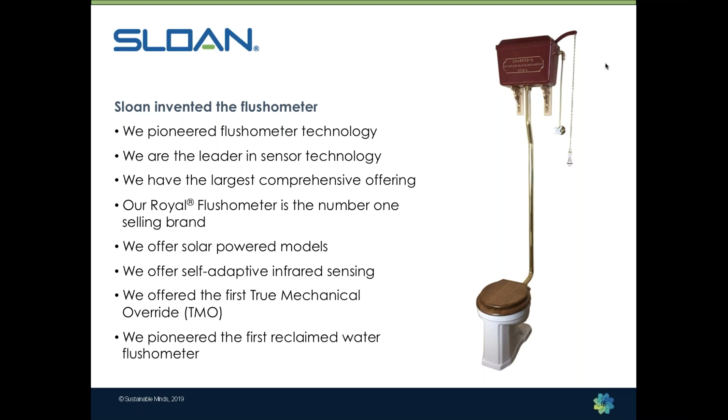So I mentioned earlier that Mr. Sloan invented the Royal Flushometer back in 1906. His invention replaced the tank and chain setup that was common back in those days. That product consumed anywhere between 10 to 12 gallons of water to flush a toilet. The Royal valve at that time used only 6 gallons of water, so right away you were saving half the amount of water. Originally, it was invented as a water savings device.

Construction was booming in 1906, and Mr. Sloan worked with architects, engineers, and building owners to get his new product installed into the newest buildings in Chicago. In his first year, he sold 1 flush valve. He knew he had a great product though, so he continued to work with designers, engineers, and building owners in Chicago, but also spread his efforts to Milwaukee, Detroit, and other nearby cities, and his work paid off. In 1907, he doubled sales.

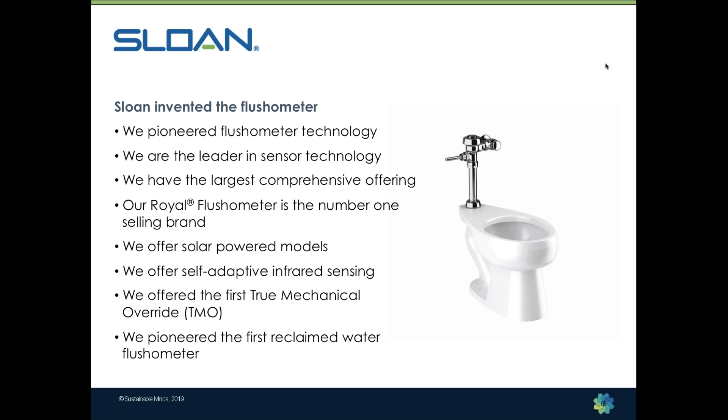Yes, he sold 2 valves in 1907, but fortunately Mr. Sloan was a very persistent man, and he continued to push his product. Sloan's became the company that it is today, and the Royal Flushometer has grown to be the number 1 selling flushometer brand.

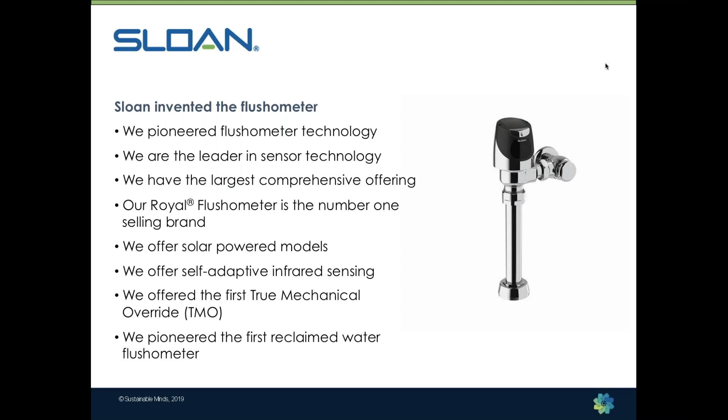The product has evolved over the years. It's now offered with battery or hardwire sensor technology, dual flush and sensor dual flush technology. We've even incorporated a PV panel into sensor units that's able to recharge the internal capacitor using just the ambient light in that restroom.

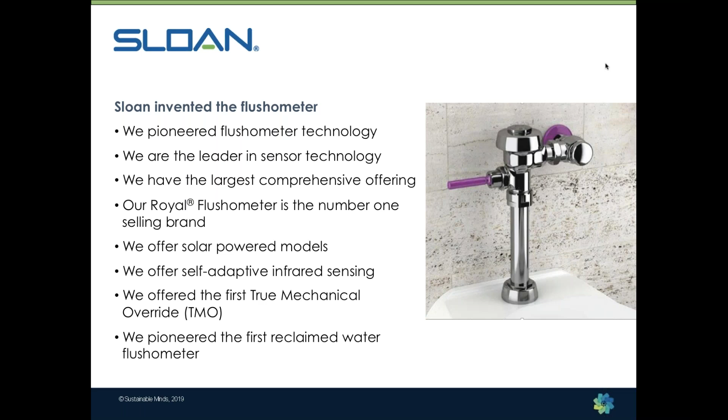We also have a reclaimed water flushometer. This product was designed specifically for the harsher qualities of reclaimed water. It comes with the proper Pantone purple diaphragm kit internally, and you can also get it with the optional purple colored handle. Also per the plumbing code, we have to supply a non-potable water plaque that you have to place near that flush valve, just to ensure no one tries to drink the water out of that urinal or toilet. Yes, that's actually part of the code.

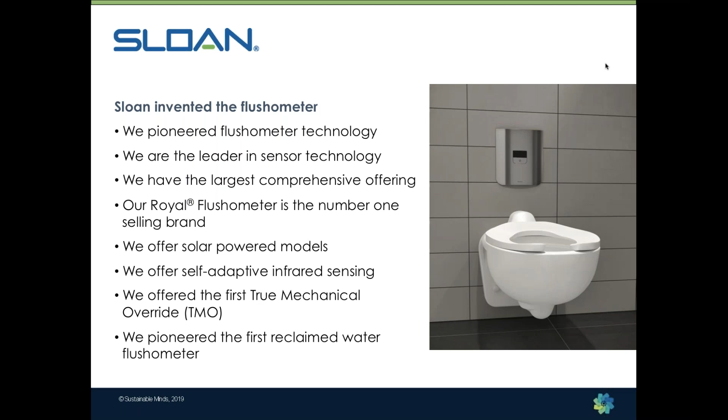The evolution continues today with our concealed valve that doesn't need a chase, which gives you back additional square footage to that building or project. The CX valve you see here can be installed and maintained all from the front panel. It's a small panel that allows you access to that valve and plumbing behind the wall. Kind of a nice, new, sleek, modern design for flush valves.

Our vitreous china fixtures have all been engineered specifically for commercial use. This allows our products to achieve high MAP scores for all of our vitreous china fixtures. The MAP performance or MAP score is an ASME fixture standard that rates the flushing performance of water closets. So if you're specifying water closets, the higher the MAP score, the better the performance of that valve. The highest MAP score achievable is 1,000, so you're trying to find a flush valve to specify that's close towards that 1,000 score.

We also offer a full line of washdown, water-free, and hybrid urinals. Our washdown urinals are available in a range of flush volumes, everywhere from a half gallon, a quarter gallon, down to an eighth gallon. The hybrid, which you see there, is the newest version of our water-free product. This is a water-free product device that's actually plumbed to the building's water supply system.

Most of the issues that we've heard about water-free units were from the lack of maintenance on the actual units. When that cartridge is changed out, the custodial staff should be flushing out that drain with about 5 gallons of water. Unfortunately, from what we've discovered, this wasn't actually being conducted.

What happens is struvite, the minerals from urine, collects and builds up around that drain and constricts the flow out, which causes many of the issues associated with water-free urinals. So the hybrid uses our jet rinse technology and automatically purges that drain line with 1 gallon of water every 72 hours, which washes out the back of the cartridge and keeps that drain line clear. This means the only maintenance custodial staff would have is to change that cartridge out whenever needed. So the hybrid, even though it's plumbed to the building's water system, is still considered a water-free device by USGBC because it consumes less than 150 gallons of water per year.

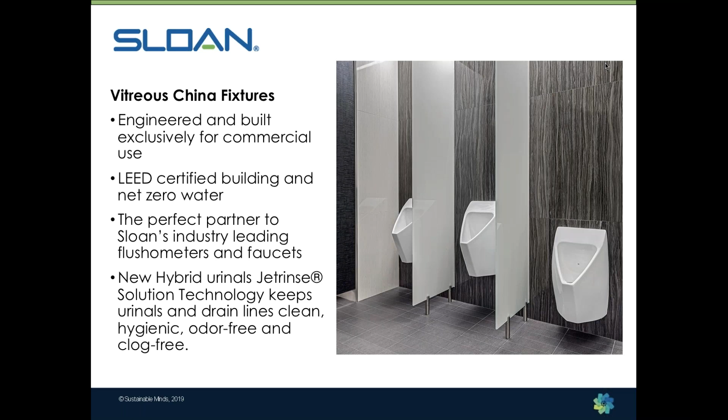Sloan was also the pioneer in the development of commercial sensor faucets. We now offer the most comprehensive line of sensor faucets for the widest array of applications, with more styles, designs, and options than any other manufacturer out there, so designers, architects, and engineers can find the perfect solution to meet their needs while staying within budget.

Our faucets are available in a variety of flow rates, from half a gallon down to 0.35 gallons per minute. Several models can also be programmed to run for a certain amount of time to help purge water supply lines and keep bacteria from growing in lines that aren't used very often.

We have a wide variety of power options including battery and hardwired, and we also have PV and turbine power harvesting options, so you can incorporate those into just about any Sloan faucet. Our newest feature is our recently released Sloan Connect smartphone app.

The system allows you to sync with a handheld device, whether it's an iPhone, a tablet, or a Samsung, whatever. You can tap directly into the Sloan faucet, which really helps because you can troubleshoot that faucet without actually taking it out of service. So you tap into it, and it'll tell you various data points like battery level, water consumption, and a host of other data points on that particular Sloan faucet.

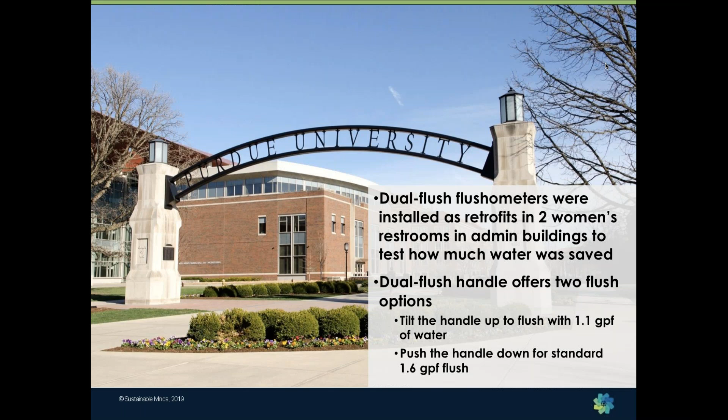Just a real quick few case studies. The first is from Purdue University, where the standard flushometer handles were swapped out with dual flush handles. If you're not familiar with dual flush, the handles offer two different flush options: tilt the handle up for a light flush of 1.1 gallons per flush, or push it down for the standard 1.6 gallons per flush. Purdue retrofitted two women's restrooms in two of its admin buildings with a total of 12 different handles. The school's engineering team chose the printing services building and the telecommunications building because both buildings had good historical water use information.

The restroom plumbing fixtures are the only major sources of water in those buildings, and women actually comprised a high number of those buildings' populations. In the printing services building, water use dropped from an average of over 10,000 gallons a month down to about 5,800 gallons per month, resulting in a 43% drop in water usage. In the other building, water use dropped from about 12,000 gallons a month to about 8,600 gallons a month, for a total median decrease of about 30%.

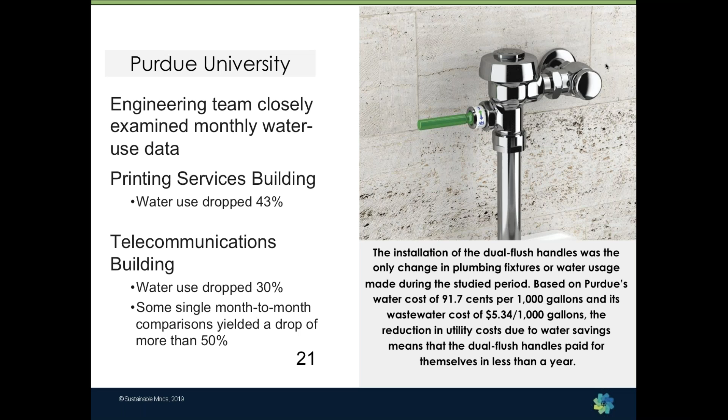But there were some month-to-month comparisons where the yield dropped more than 50%. The installation of the dual flush handles was the only change they made in those bathrooms during the study. So based on Purdue's water costs, the ROI was pretty quick for them—they saw the payback in less than one year.

Another case study, a quick one: Century Plaza Towers in Los Angeles, a 2.3 million square foot Class A office building. They decided to update their existing core public restrooms on each of their 44 floors. This created an opportunity for them to upgrade the aesthetics of a Class A property, but it also let the architect specify fixtures that were more water efficient in order to meet the building's commitment to LEED and LEED Gold.

So what they did is they swapped out several different products. They swapped out the existing 1-gallon urinals with hybrid models, and doing that alone helped them save about 4 million gallons of water. They changed out the water closets from 3.5 gallons down to 1.28 gallons, saving them almost 9 million gallons of water. And the faucets themselves, they swapped those out with half-gallon sensor faucets, resulting in almost 6 million gallons of water saved. So you can see how water savings can quickly add up when you scale it up in a large office complex like Century Plaza Towers.

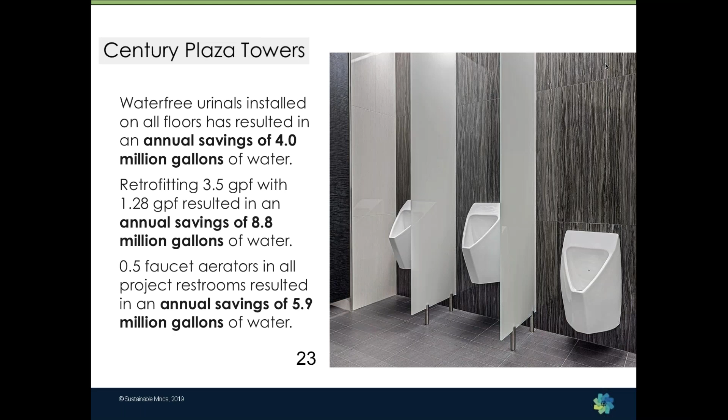The volume of water flowing through these various commercial restroom fixtures and fittings has declined dramatically over the last 30 to 40 years. However, we're at a point now where we're flushing water closets with as little as 1.1 gallons or even 1 gallon of water, and urinals are at a pint or, in some cases, water free. So I'm not sure how much lower we can continue to drive flush volumes down without sacrificing the sanitation of that restroom. The primary function of these products is to ensure a safe and healthy environment, so we shouldn't be sacrificing water sanitation for water conservation.

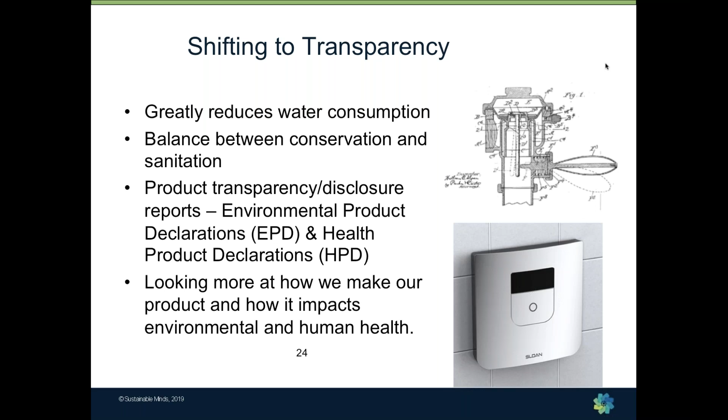About 4 years ago, Sloan started to look into product transparency reports. We started looking more at how our products impact environmental and human health, and not so much water conservation. We started getting more and more requests from our customer base—architects, designers, engineers—asking us for these various documents. And we started seeing certain firms actually giving preference to manufacturers who offered EPDs and HPDs on their products.

Their clients were asking for these types of reports because all the high-performing building frameworks are now offering credits for product transparency. So LEED version 4, Living Building Challenge, BREEAM, Green Globes—all these different frameworks now offer credits for product transparency.

Like I said before, Sloan currently offers the widest breadth of product transparency reports. We provide EPDs and HPDs on our manual diaphragm and piston flushometers. We have them on our top-mounted battery sensor flushometers, our urinals, water closets, and lavatories, and most recently on our sensor faucets. The nice thing about these reports is that all of our EPDs have been externally critically reviewed.

They now meet the LEED version 4.1 criteria and can offer the 1.5 product value. So as you're trying to meet that 20 product or 10 product number as outlined in LEED, each Sloan product that has an EPD will count 1.5 times towards that number, which helps you and your client achieve that MR credit a little more easily.

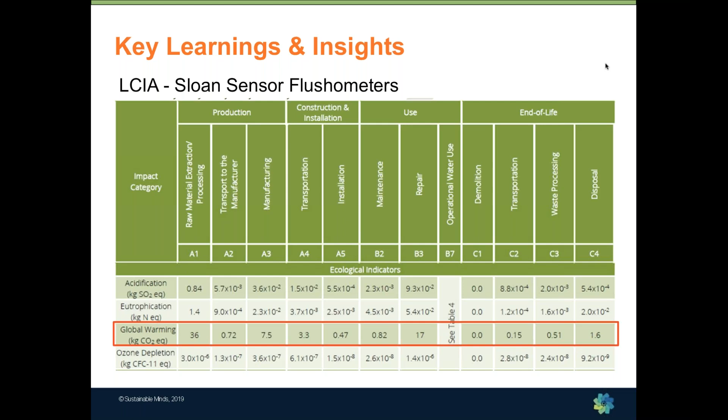We broke out the operational water use because this product has different flush volumes. So if you compare that 36 and look at the global warming potential on the water side, you can see it's a lot higher.

With potable water, most people don't realize the carbon intensity, the embodied carbon that potable water actually has. Consider the amount of energy it takes to extract that water from its source, pump it to a treatment facility, treat it to drinking standards, pump it to the end user, sometimes heat it, use it, and bring it back to a treatment facility where it's treated again before it's released back into the environment. So there's a huge carbon footprint associated with potable water.

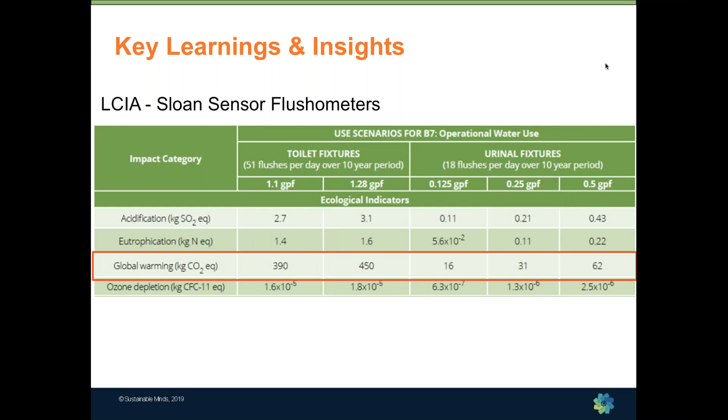So I knew that I wanted to do something to help reduce our carbon footprint. What I did was partner with Arbor Day Foundation. For those of you not familiar with Arbor Day, they're the world's largest nonprofit dedicated to planting trees, so they know exactly how much carbon a tree can sequester over its lifetime. I knew exactly how much carbon Sloan was creating with our products, so we partnered with them and purchased reforestation credits to offset our carbon footprint.

There are a lot of different ways you can offset your carbon footprint, but this had a nice water connection, right? It improved water quality. Trees obviously improve air quality, they help with flood control, they restore wildlife habitat, and they also create jobs, right? We need someone to plant the trees and maintain them to make sure they grow up to be a healthy forest.

I wanted to be sure that we weren't accused of greenwashing. So all the data we used to offset the carbon in our products was extracted from our ISO life cycle assessment reports. Our carbon offsets are registered and verified through the American Carbon Registry, and that process has been certified to the British Standard Institute's PAS 2060 standard.

So if you want to find out more about our carbon neutral product lineup, you can check it out on sloan.com.

So when I look at the trends through my lens, I'm seeing more requests, like I said earlier, for HPDs and EPDs from our customers. I believe LEED version 4.1 has done a good job easing some of the strict requirements of LEED version 4, and we're starting to see more projects going after the MR credit, which is great. I also think that as more buildings continue to certify to WELL, there's going to be more of an appetite for product HPDs too.

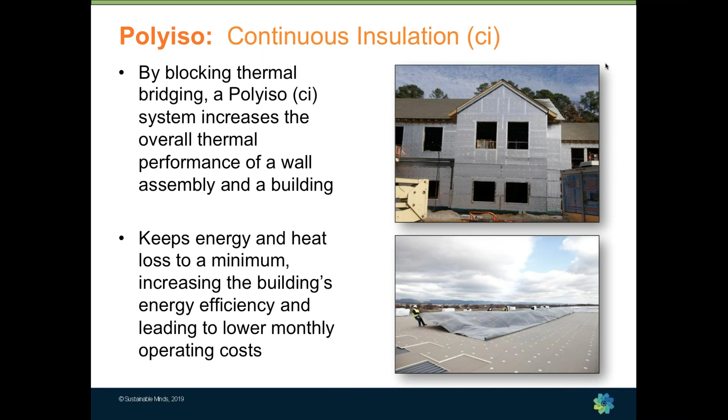Polyiso is one option for the insulation of a building envelope, and typically preferred because there's a thinner profile with a higher R value for added energy efficiency. R value is essentially a product's resistance to heat flow, which means the higher the product's R value, the better it is at insulating the building and improving energy efficiency. The other insulations in our industry are EPS, or expanded polystyrene, XPS, or extruded polystyrene, and mineral fiber.

An example of the thinner profile making a significant difference is that in a typical 4-inch masonry cavity, using our product offers more space for airflow and work area. Our 2-inch product offers an R value of 13.3. You would need a 3 or 3.5-inch thick product when using one of the other insulation options. This thinner profile maximizes the usable square footage of the building and helps save on costs and labor.

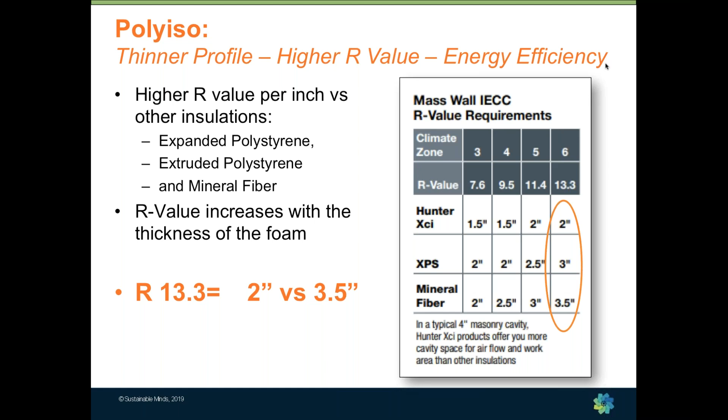Hunter Panels is a member of PIMA, which stands for Polyisocyanurate Insulation Manufacturers Association. This organization is a unified voice for the polyiso industry in North America. They proactively advocate for safe, cost-effective, sustainable, and energy-efficient construction. PIMA focuses on issues, research, and solutions that help advance the use of polyiso in new and retrofit construction. They also oversee all polyiso manufacturers to ensure we are supplying the very best quality products to our industry.

According to PIMA, the energy savings potential of polyiso roof and wall insulation over a typical 60-year building lifespan is equal to up to 47 times the initial energy required to produce, transport, install, and eventually remove and dispose of the insulation.

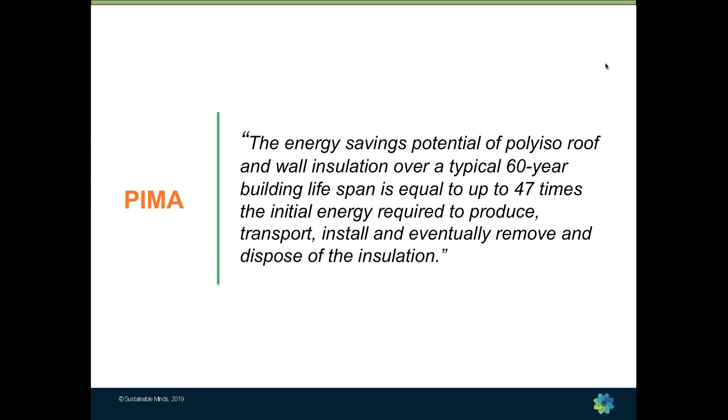PIMA and polyiso products have received EPA and sustainability awards, including the U.S. EPA's Climate Protection Award for leadership in promoting energy efficiency and climate protection, the Sustainable Buildings Industry Council's 2003 Best Practice Award, and the EPA's Stratospheric Ozone Protection Award for leadership in the CFC phase-out for polyiso and in recognition of exceptional contributions to global environmental protection.

Polyiso is an ideal choice for green building designs because when it's part of the building envelope, it reduces the need for energy, which can reduce air pollution and reduce greenhouse gases.

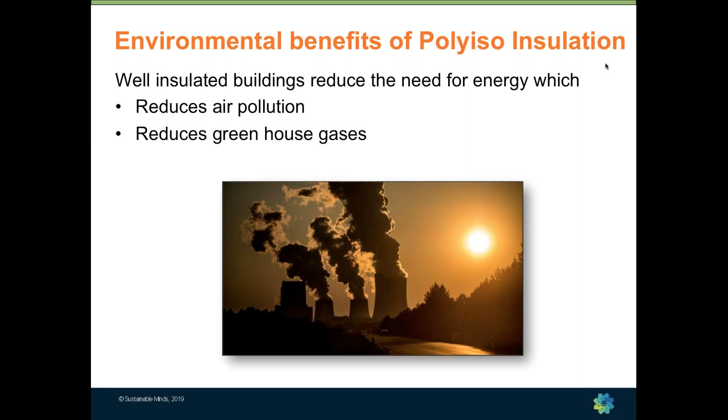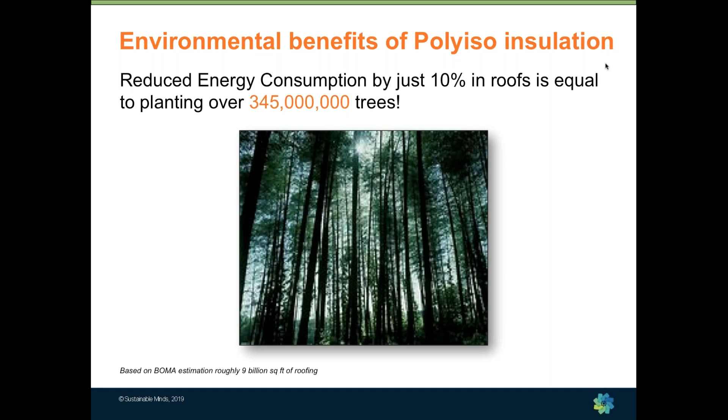Reduced energy consumption by just 10% in roofs is equal to planting over 345 million trees. Needless to say, there's a lot of greatness that comes from planting 345 million trees. These include: it generates $10.7 trillion of oxygen, controls $10.8 trillion worth of soil erosion, recycles $12.9 trillion worth of water, provides $21.4 trillion worth of air pollution control, and the equivalent of removing 42.7 million cars off the road for 1 year.

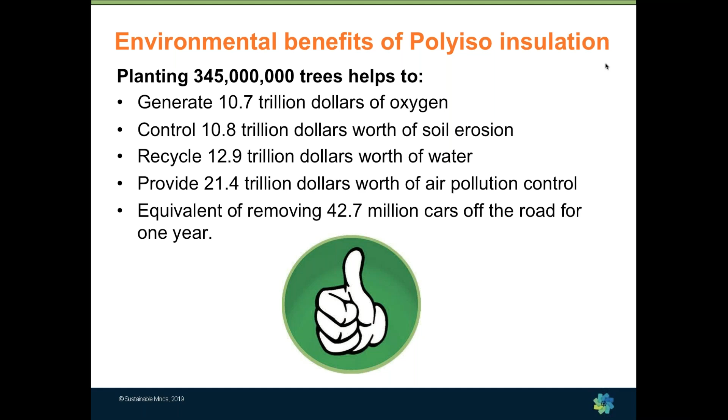So why is Hunter Panels polyiso an ideal choice for green building designs? We have been evolving our product as the industry demands, making changes based on sustainability and environmental concerns. In 2003, we changed over to a new blowing agent that is more environmentally friendly and started using NexGen Chemistry.

This blowing agent has zero ozone depletion properties, contains no CFCs, HFCs, or HCFCs, and has virtually no global warming properties, all the while maintaining our high R value per inch. This is critical as the impact of climate change is a worldwide environmental concern. Our products contain both post-industrial and pre-consumer recycled content. We have superior fire resistance and we contribute towards LEED credits.

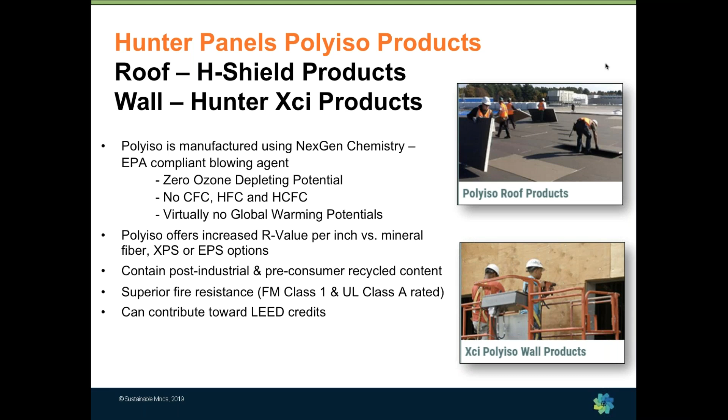When designers and specifiers are trying to acquire LEED credits, polyiso is a contributor by meeting or exceeding R value goals while minimizing the thickness required for wall or roof assemblies. We already touched on the recycled content, but polyiso can be removed, reused, and salvaged on-site or off-site. As one of the most thermally efficient building insulations, polyiso allows for indoor environmental thermal comfort.

Architects and specifiers want to specify products with EPDs, so we listened, and we led the market by obtaining Hunter Panels specific EPDs on all of our roofing and wall products. This offers one full LEED credit when our products are part of the design build, since we have a manufacturer's specific EPD.

To simplify the process for you, all of our products with transparency disclosures can be found in our transparency catalog listing. We currently have 13 products with our manufacturer-specific EPDs for roofing applications, and 10 products with our manufacturer-specific EPDs for wall applications. Our products are primarily specified under divisions 6100 and 7200.

So let's talk about our products. We offer a wide variety of products for low slope applications, also referred to as flat and tapered products, as well as steep slope products to go underneath shingles, standing seam metal roofs, tile, and slate. Our Cool Vent product is used under shingles in order to increase the life of a shingle roof by approximately 10% by allowing airflow throughout the entire roof system. We also provide cover boards and composite panels.

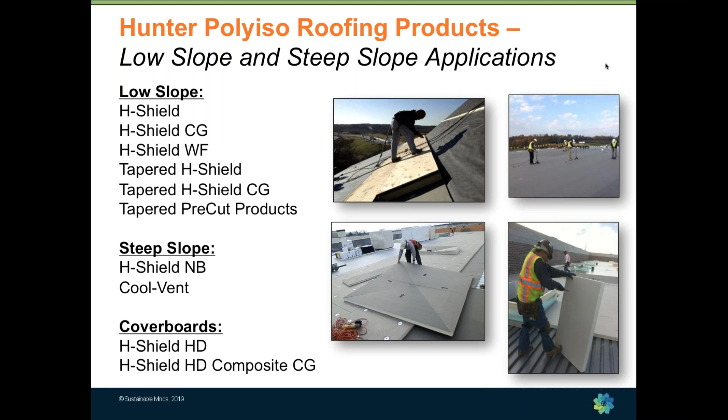I mentioned that our headquarters is located in Portland, Maine. This particular case study is very near and dear to our hearts. Our Cool Vent product was used on this high-profile LEED project. This building was awarded a LEED Gold building certification. Due to the harsh winter weathers here in Maine and extreme coastal elements, our Cool Vent product was installed using multiple layers with staggered joints to reduce thermal bridging and further increase the rooftop's overall energy efficiency.

Our state senator, Susan Collins, said, "Energy conservation is important to curbing rising heating and electric bills, and a lot of hard work went into making this building environmentally friendly. This building raises the threshold for other buildings in Maine to become more energy efficient. This LEED certified building demonstrates the strong commitment to environmental stewardship."

Here's another project in which our H-Shield NB, our non-vented nail board, was used and achieved a silver award by the Asphalt Roofing Manufacturers Association. This building was looking to achieve reduced heat loss through the attic and prevent dangerous icicles from forming.

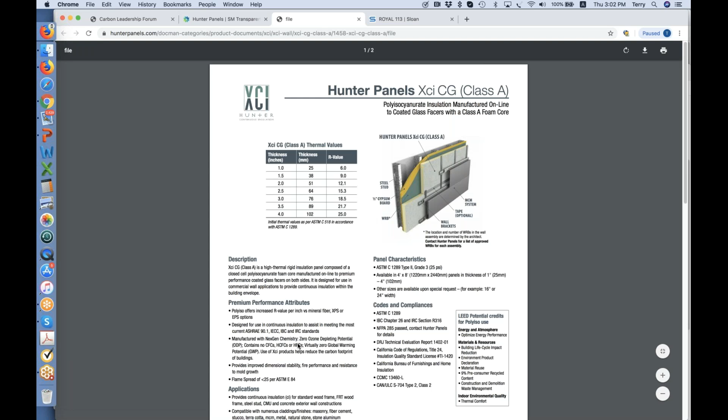The last thing I'll invite you to explore on your own is the MasterFormat filtering. Depending on where you are in your process, you can say I just want to see all the manufacturers and all the products in Division 7 with transparency information, without even selecting a section. In just a couple seconds, you'll see there are 126 brands and over 1,100 products. You can click through page by page, or use any of these filters in any order to narrow down to just what you want to explore.

So you might say, 126 brands is a lot, let me just see who they are. You can go here and select the brands you want to see, and then you'll just see those when you click the results.

Or you might say, I'm working on a LEED project, so what I really want to do is see the products across all the sections in Division 7 where I'm going to earn the EPD credit. We've quickly filtered it down to 66 brands and 473 products. Then you can even say, which ones let me earn both credits with the same product? Now you're down to 5 brands and 277 products, and you can see which brands those are.